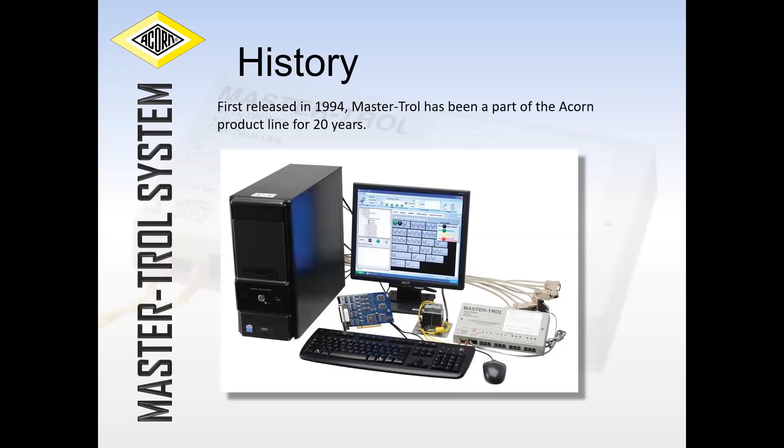A little history about the Master-Trol to start with. It was first released in '94 and has been part of the product line ever since. It all started off as fixture options that allow valves to operate with precise timing, have applied lockout options, as well as provide remote operation and disabling features. Again, this was primarily designed for the penal institutions where they can control when toilets and lavs were being used, or if they were being abused, to disable them so they're not, so inmates aren't flooding out their cells.

You'll notice on this particular controller, all of our Master-Trol controllers have the ability to connect up to 12 different solenoid valves. And when we talk about solenoid valves, if you look at a combi fixture, for example, combination lavatory and toilet, you have hot and cold water. You also have your toilet water. So theoretically, you've got 3 solenoid valves per fixture. Again, on the controller, you've got 12 stations where you can plug these into. So each solenoid has its own connection to the controller.

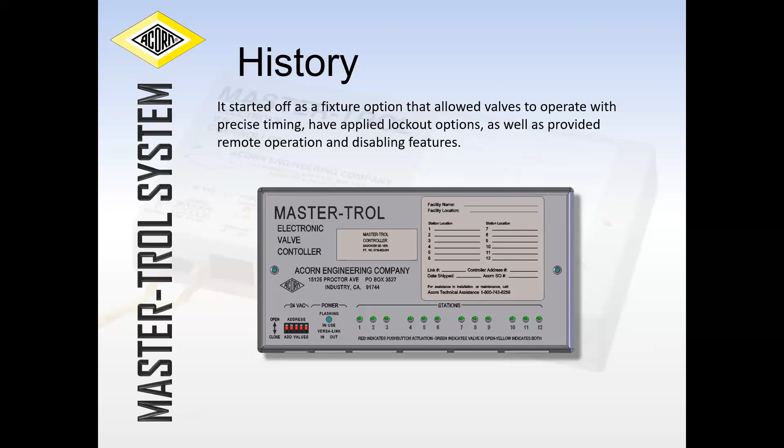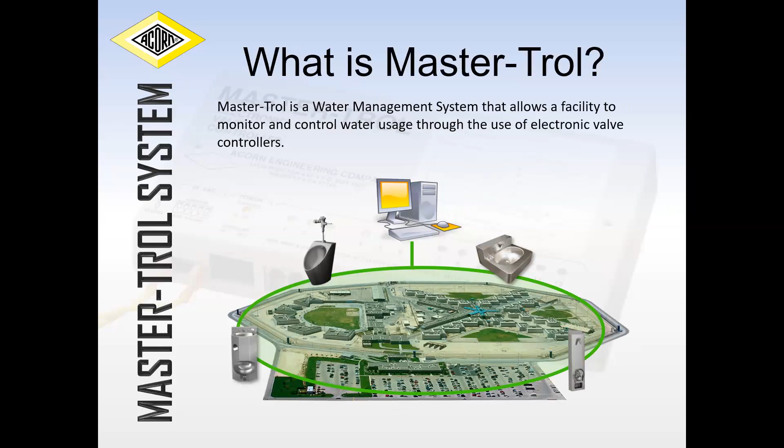Since then, we've grown into water management systems where now, again, today we offer controls for water savings as well as security. What is Master-Trol? Well, Master-Trol is a water management system that allows facilities to monitor and control water usage through the use of electronic valve controllers. Again, we talk about our controller. This is the main one, the main item that is part of the system itself.

Again, we talked about on a combi how you've got your solenoid valves on your lavatory for your hot and cold, or if it's tempered water only or cold water, either option works, as well as connections for your flush valve. What the controller is doing is controlling the valve timing characteristics.

When we talk about valve timing, how long do they run for? How long do they stay off for? How many times can you flush a toilet in a certain period of time?

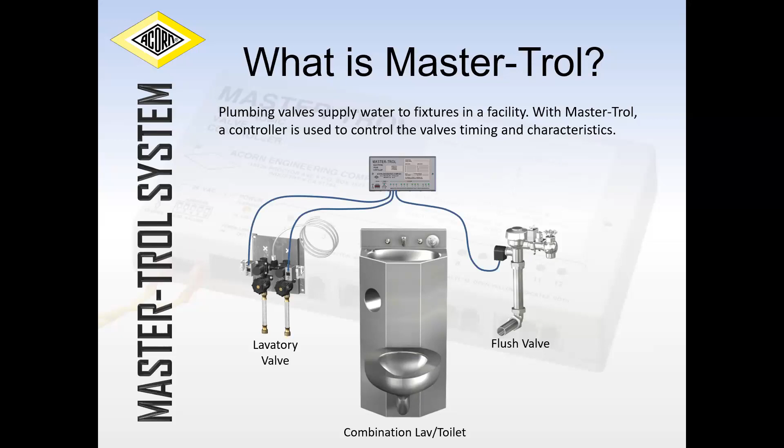With a controller, you've got connections to each solenoid valve to the controller. We're showing 3 going to this. Having 12 connections to it, theoretically, you can have up to 4 fixtures tied to a controller, assuming that you've got 3 solenoid valves per fixture.

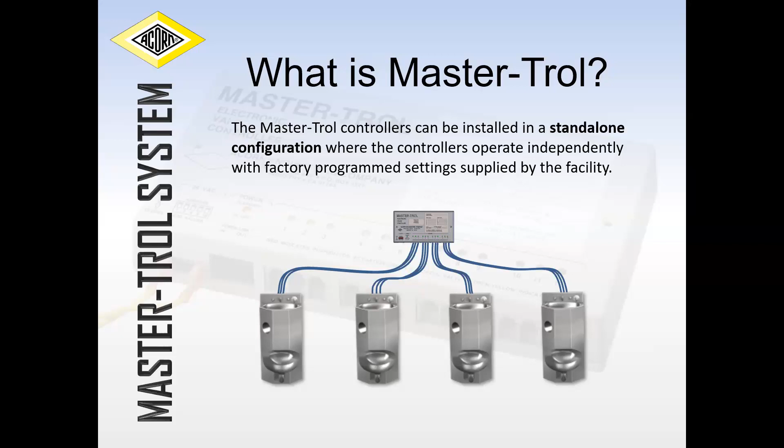Now, your Master-Trol controllers can be installed in a standalone configuration with independently factory programmed settings. So most often when we're doing timing on these controllers, the timing is done in the beginning, it's set once and then forgotten about. It's never changed or adapted after the fact.

When you get into larger facilities, they want to be able to control at will when certain fixtures are turned off or turned on. In a security application, if they were going to be checking cells for contraband, they can shut the cells down without the residents knowing about it, eliminating the option for them to flush contraband down. There's a couple of different ways of working with the controllers.

They can either be pre-programmed in the factory to whatever settings the facility requires. We can do it with a palm top controller, and what that does is, with the controller, if you wanted to make a change, you can then take that palm top to the controller, plug it in, and adjust settings as you see fit.

Or the ultimate way of doing it is using our computer system that we offer, our CDT, as it's called. Through that computer, you can monitor all of the solenoid valves that are on the system.

Maximum on a system that we can do, we can run about 4,000 feet of cabling from the computer to the furthest controller. That's right. And you can have as many as 3,072 solenoid valves on a system. That's sort of the max that you can go.

So if you're looking at a big prison facility where they have hundreds of cells, we can accommodate that. Or if you're doing a small police station where maybe they have half a dozen cells, it's an RCMP location up in Northwest Territories where they have 4 or 5, we can do something like this in that small of a facility.

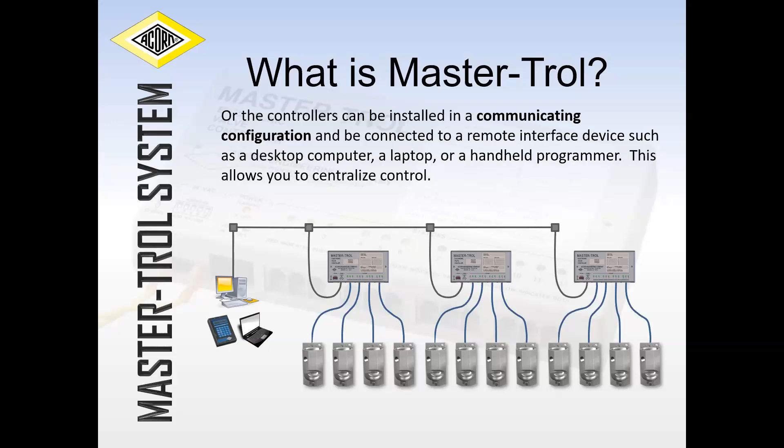Again, where is Master-Trol used? We talked initially about high security applications, whether that's a full-blown prison, police stations, courthouses, ideally where they're used. We're finding applications in healthcare, mental health facilities, where you have patient rooms where you want to limit how often the water is being used. Again, educational facilities.

Keep in mind, it's not just for toilet use. It can be used on lavatories, can be used on showers, could be used on drinking fountains as well. There's wide-ranging applications where it can be used, where you want to be able to control water.

For showers, if you're using a metering shower, typically metering showers are only able to run anywhere from 5 seconds to a minute. With Master-Trol, if you want to have those showers being able to run for 10 minutes at a time or 8 minutes, you're able to configure those showers to do that. So it gives you a lot of options on how to set this up.

Again, we're being used at Metropolitan Detention Center in Albuquerque, New Mexico. We have Waterloo Regional Police Station locally that's just getting it put in, with final install being done within the next 2 weeks and the computer system being set up. We have a police station in Belleville with 29 cells that has a Master-Trol system, and there's also one in Niagara Falls that has it as well. We've got a couple of other prisons in the U.S. where it's being installed. The Salinas Valley State Prison has Master-Trol installed in their mental health part of the building.

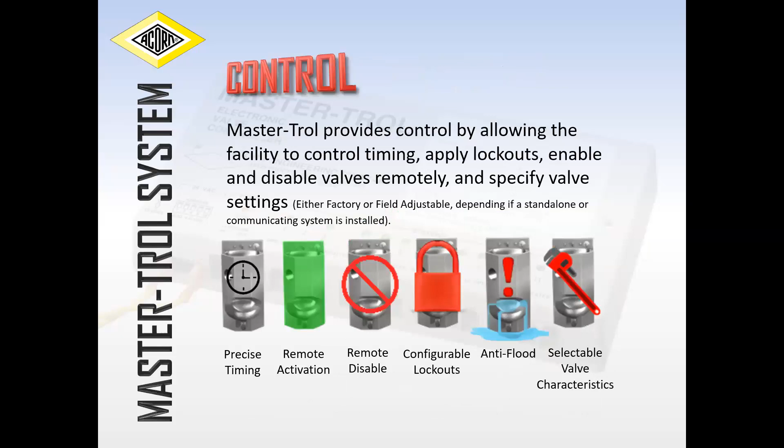It almost reminds me of the similar change in trap seal primers, from the flow-actuated or pressure-drop-actuated trap seal primer to the electronic trap seal primers. When you're just saving a little bit of water at one fixture, it's not a vast savings, but when that's extrapolated across all the fixtures across the year, you end up with a significant amount of water savings from more accurate usage, right?

Correct, and that's a great analogy, Zach. Being able to put electronic primers in, they're only priming once every 24 hours versus priming every time it's sensing a drop in pressure or when a fixture is turned on, depending on the type of primer being used.

For control, Master-Trol provides control to the facility. We talk about controlling timing, applying lockouts, enabling or disabling valves remotely. All this can be done through the computer system. If it's programmed in the facility, those timings are set at the factory, and the facility wouldn't have to adjust it at all.

Some of the things it's preventing is anti-flood on a toilet. So if somebody's plugging up a toilet, you want to be able to control that. Everything can be accessed from within the pipe space and behind, whether it's a walk-in pipe space or the controller being up in a ceiling space. As long as it's accessible, we can get at it to adjust timing if a computer isn't being used.

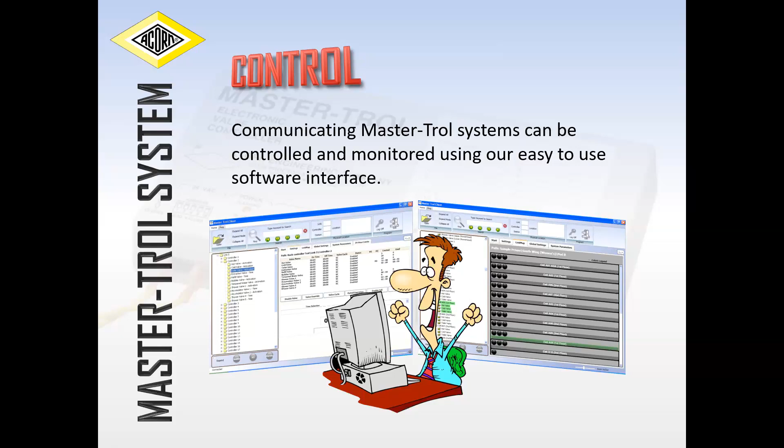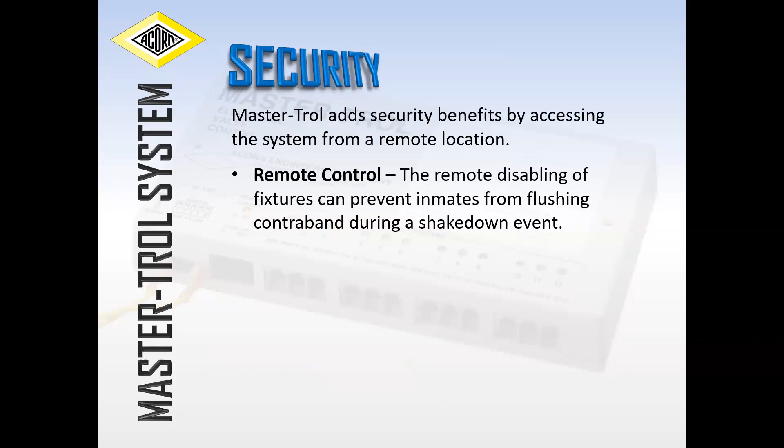With Master-Trol, it adds security benefits to the system from a remote location. Remote disabling of the fixtures can prevent inmates from flushing contraband during a shakedown event. It reduces dangerous interaction, as remote activation of the valves can reduce close interaction between potentially dangerous individuals and staff. All of this can be done within a pipe chase, so you're not having to go within the fixture or within the cell itself to get into any of these things.

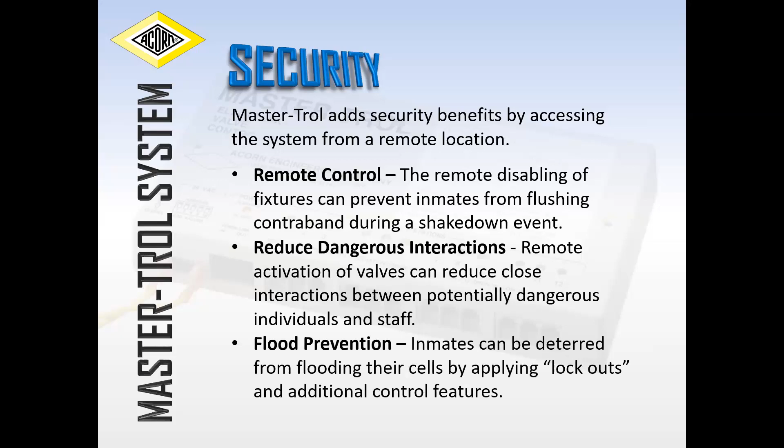Flood prevention is probably one of the biggest things we see with it. Inmates can be deterred from flooding their cells by applying lockouts and additional control features. With the lockouts, you can have it set so the inmate is able to flush the toilet, say 3 times in an hour. If they do that flush in rapid succession within the first 5 minutes of an hour, they won't be able to flush until the hour has passed. And if they happen to leave something that's causing a terrible smell, they're going to have to live with that until they're able to flush again.

Zach, you were talking a little bit earlier about water savings with trap seal primers. We did a water savings calculation with a facility in 2011. We were asked to demonstrate water savings by using Master-Trol at the Southwest Detention Center in Murrieta, California. We installed 2 water meters that recorded water usage in 2 sections of the facility - one meter recorded usage in 4 cells that had Master-Trol, and one had it without.

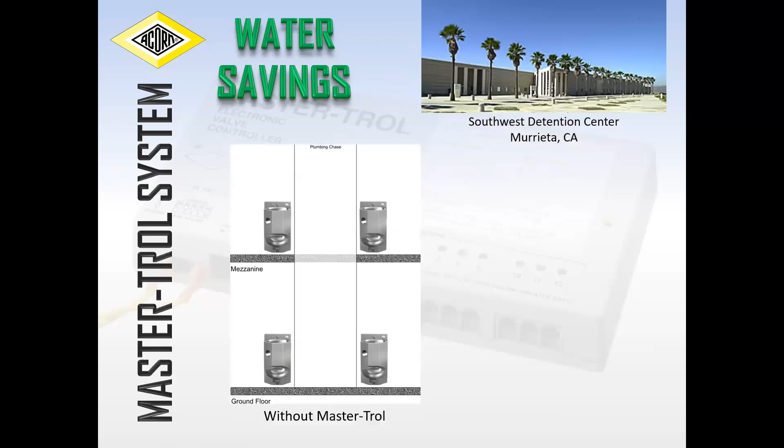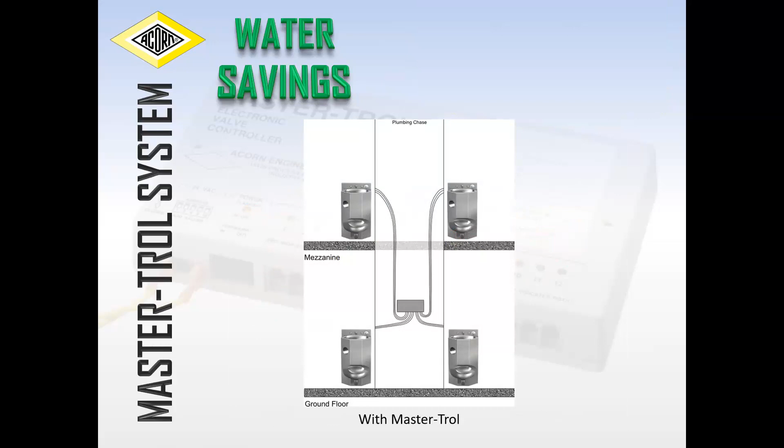Here you're seeing images where you've got a Master-Trol controller that's tied to 4 fixtures. 3 months later, between the two, the one with no controls went through 22,700 gallons of water. With the 4 fixtures tied to a Master-Trol controller, they ended up going through 8,380 gallons of water. So significant water savings just in 3 months.

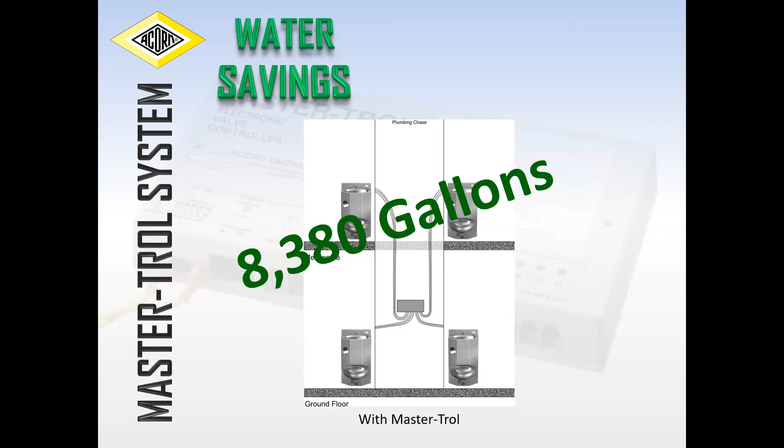If you did that over a year, you're talking about a 63% savings. And that was just 4 cells. Imagine doing that over, in this particular facility, 522 cells. When they went through the math, they calculated a savings of just under 7.5 million gallons of water.

In California at that time, the facility was paying $3.27 per 100 cubic feet of water. That gave them a savings over the year of a little over $32,000 in total. So putting in Master-Trol saved the facility a ton of water and a fair decent amount of money as well.

And that's not even necessarily just the reducing flow rate - there's no flow rate reduction there. No, that's just being able to shut things down when it needs to be shut down, whenever anything has gone into lockdown. Using it, if somebody's flushed the toilet 3 times rapidly, they're not able to use it for an hour. So you're restricting how often toilets and lavs can be used, and how much water is being used at any given time during the day.

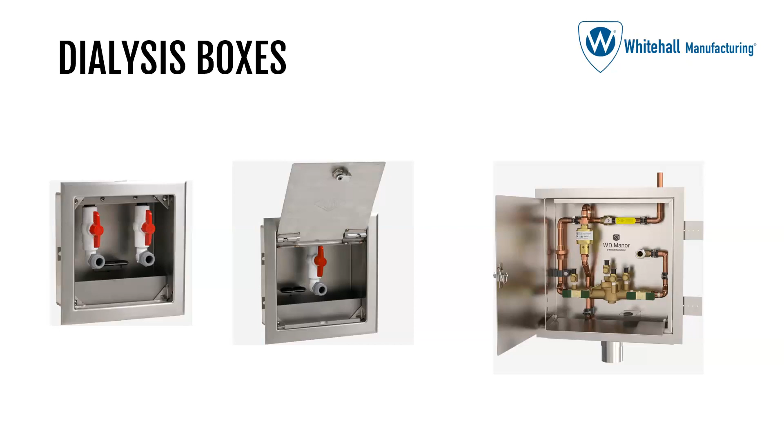So what is a dialysis box? Well, a dialysis box is a wall box. It's framed, recessed into a wall at each hemodialysis station that contains connections for the dialysis machine to receive acid and base concentrates and treated water, and dispose of waste products as well. This is the definition from the Centers for Disease Control and Prevention.

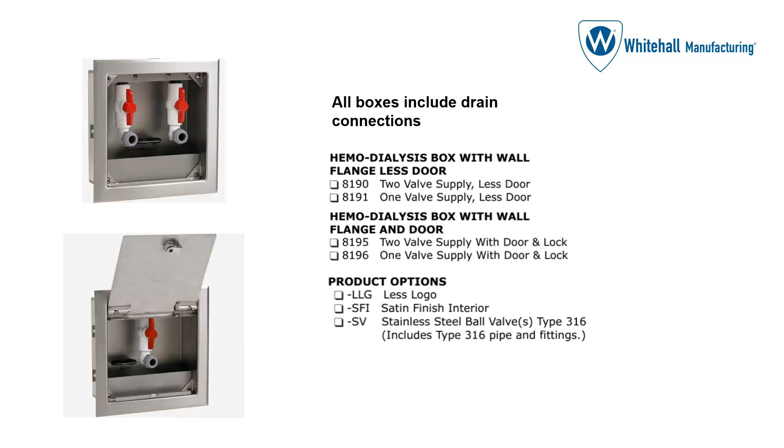Dialysis boxes include connections for both water coming in and a drain connection for discharge. There are different types of boxes, whether they have doors, no doors, just a flange, one valve or two valve, brackets for directing the hose from the dialysis machine into the drain connection in the bottom of the box. What you typically see as a standard is plastic valve assemblies on the inside. The boxes are typically stainless steel, but can also be done in 316 stainless steel. The piping and fittings can also include 316 stainless steel.

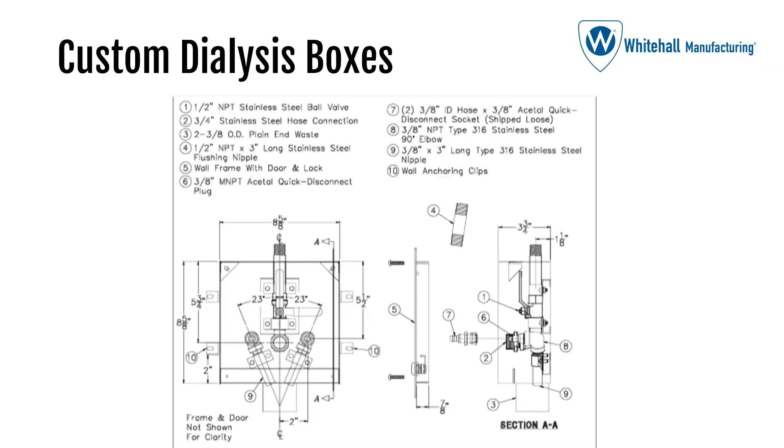Those are just our standard boxes. Our all-in-one modular system, as I mentioned before, our W.D. Manor box, is everything all in one. It's a new offering, stocked in the US. So what is this dialysis box and why is it the best on the market? Everything is located within the box itself - safe water delivery, no cross-contamination, job savings on all your piping, and you can customize it. Everything is in one box.

So again, what's in the box: a safer experience for the patient and the provider, prevents cross-contamination and minimizes liability. You'll notice the particular one we're showing here has a backflow preventer, also has a trap seal primer. We can include thermostatic mixing valves, has ball valves to isolate. There's also a drain connection on this one, a drip tray that folds outwards, so if your hosing comes loose within the box, any water that goes on that drip tray is directed back into the drain.

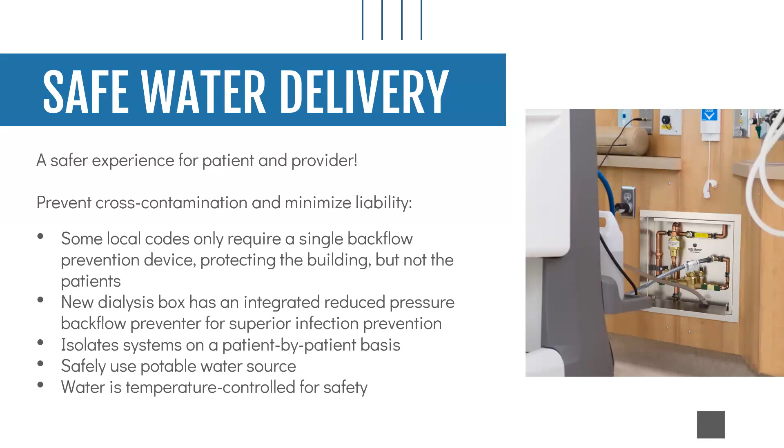This new dialysis box has an integrated reduced pressure backflow preventer, isolating the system on a patient-by-patient basis as opposed to having one central backflow preventer. It safely uses potable water at the source, and provides water temperature control for safety by incorporating a mixing valve into the assembly.

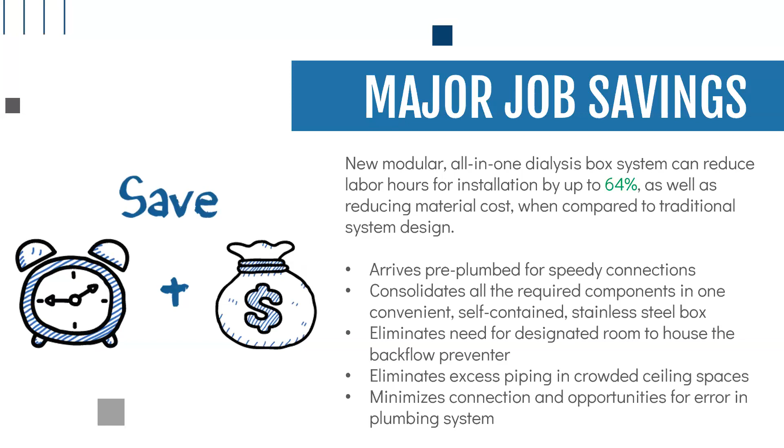It arrives pre-plumbed with speedy connections, eliminating the need for designing or designating a room within the facility to house your backflow preventer. This allows you to put in your smallest backflow preventer, eliminating excess piping in a crowded ceiling space. Probably the biggest issue is connection errors, and this reduces those.

So again, it reduces the amount of labor - you cut your labor almost by a third. Instead of putting in a conventional box, having one of these put in saves a whole lot of time in going through it. Each one is individual on its own, so each user is protected by an individual backflow preventer.

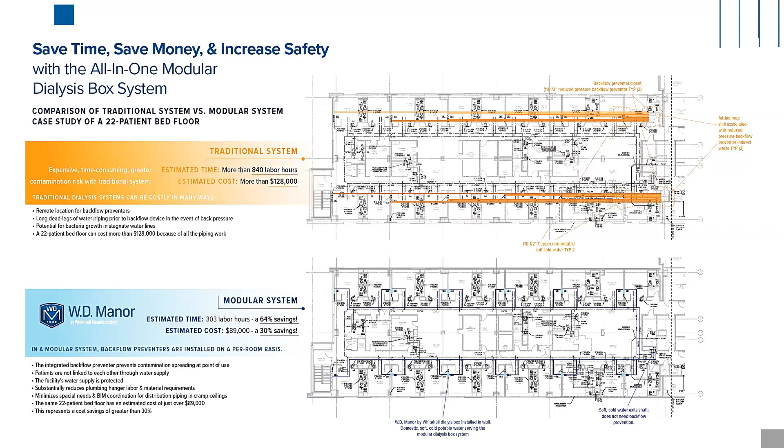We can configure the box into a different size if required to fit the existing wall spaces as well. So again, we can completely customize this box as required.

We've got two different versions. The 8193 has a backflow and a trap seal primer in it. You've got an isolation valve, your trap primer, your backflow preventer, fold down drip tray, your dialysis supply, and then a 2-inch waste connection. We also have the valves on the backflow for doing your testing when that needs to be done.

On the copper, there's a clear lacquer coat on it. If it has the door on it, the door opens a full 180 degrees. The hinge is also concealed. You've got your mounting tabs on the box to tie it into the drywall, and a discharge hose bracket, keeping that hose from flopping around within the box. It actually directs everything down into the waste connection.

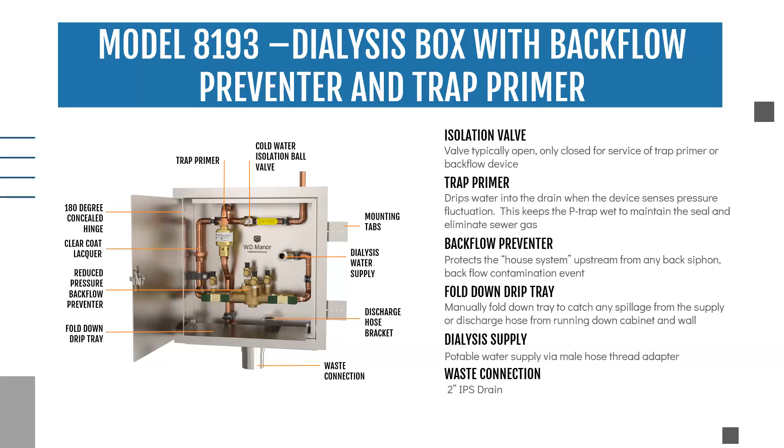Our 8194, again a dialysis box, has a backflow preventer, trap primer, and a thermostatic mixing valve. Adding the mixing valve, you've got a thermometer there to give you temperature, your isolation valves, and all the other features that the 8193 has. This box is a little bit bigger to accommodate the extra piping required by the thermostatic mixing valve.

And again, as you see in the image, that's how you would get it out of the box when it's shipped out. So everything's already there. It's just a matter of water in, drain connection out, and you're good to go.

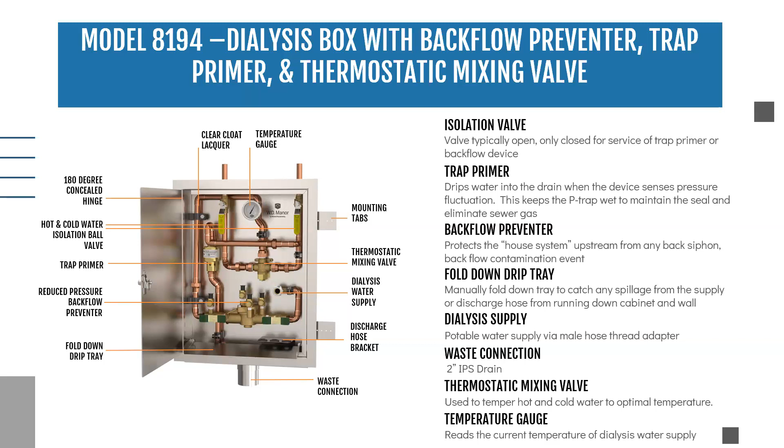Again, we talk about customization. The entry can come from the bottom as opposed to the top, quick disconnects for your supply fittings, customized sizing to fit whatever application you have, whether it's existing or not. This particular one is showing a white box. If they want it all in stainless steel, we can do that as well, and in those cases they would be made to order.

Again, types of applications - typically it's used for dialysis boxes and ICU rooms, isolation rooms, emergency departments, trauma, dialysis, infusion bays, other healthcare non-dialysis use, sterilizer hookups, Stryker and Neptune docking stations in lab spaces, usually where a piece of equipment requires a backflow and soft water, and in birthing units where they need mixed water or a mixing valve.

Non-healthcare uses include ice maker hookups - installations in some bars at State Farm Stadium, they've got this setup for their ice machines and soda fountains.

Huh, I never would have thought about it for that, but I guess, yeah, because those often need their own premise isolation backflow device as well as part of the total backflow prevention plan. That's correct, interesting. We did have a question.

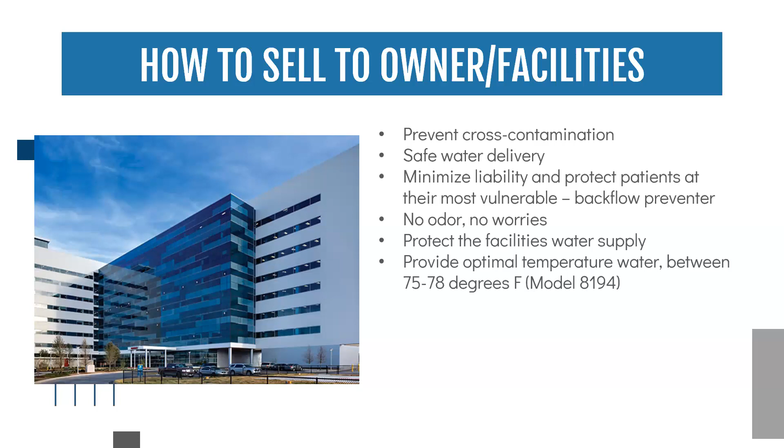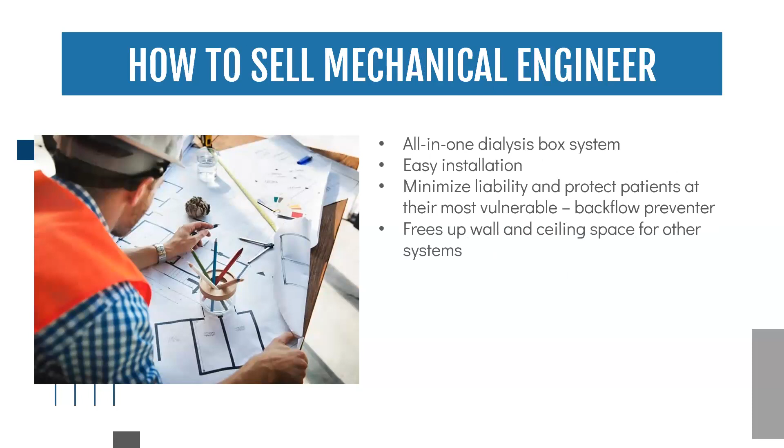With a mixing valve, we can keep the temperature constant between 75 and 78 degrees Fahrenheit using the model with the mixing valve, the 8194. It's all in one, everything's in one location. Your trap seal primer, your backflow, again frees up ceiling space so you can run other things up there, or keep it a little cleaner and not so crowded when it comes to putting things in.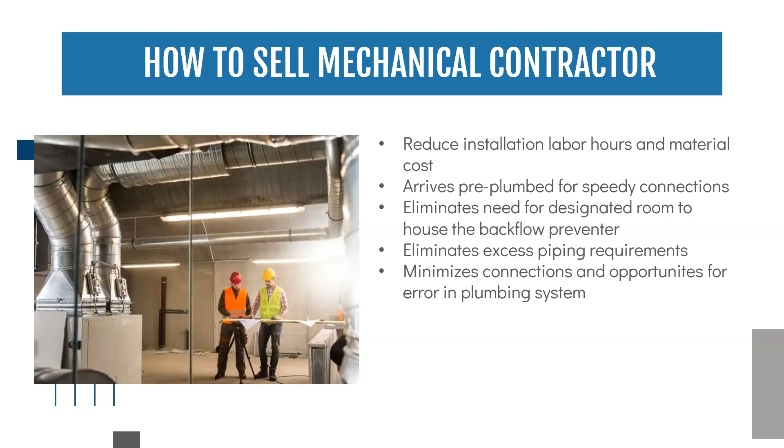Again, reduced installation, labor hours and material required. It arrives pre-plumbed and ready to go, eliminating the need to have a designated room for your backflow preventers. It eliminates excess piping requirements and minimizes connections, reducing opportunities for error in the plumbing system. The last thing you need is all this piping and a leak, trying to figure out where it's occurring. And that's the basics on dialysis boxes.

Any questions? That's great, Jared. Yeah, I think one of the interesting things to me is how often this is going to come up over the next little bit. Piecemealing all those components together is always going to be more expensive and more convoluted than getting them all in one spot.

So I could definitely see a situation over the next little bit where the typical two water hammer arresters inside of a box start getting sent out to the market. Most people are going to be looking for a connection like this, where it's an in and out and everything's in a singular box. I think it's a great idea.

The other thing I should mention, a very important point, it's CSA approved as well. Great point, very important. So as those boxes are laid out, the typical 8193, the 8194, as is, they are CSA approved. That was done probably about a year ago.

Any questions on the dialysis box?

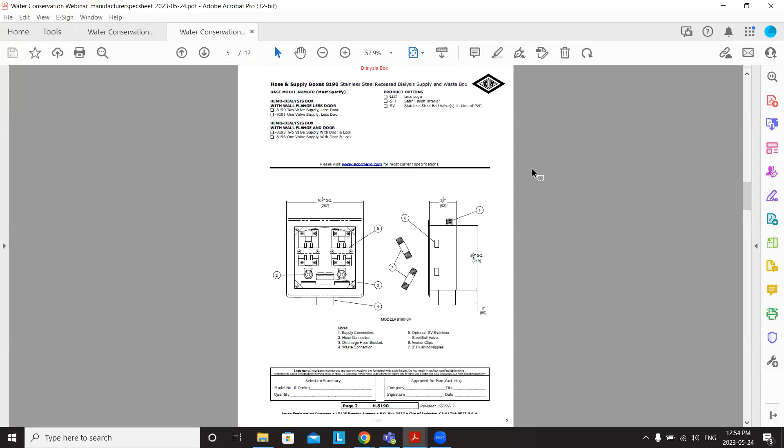With the manufacturer spec sheet format, you do get a table of contents with what you call the fixtures. You get a nice little fixture title page. I just selected a basic dialysis box, not the newly launched 8193. We have our combination unit and that shower with the MasterTrol like we talked about.

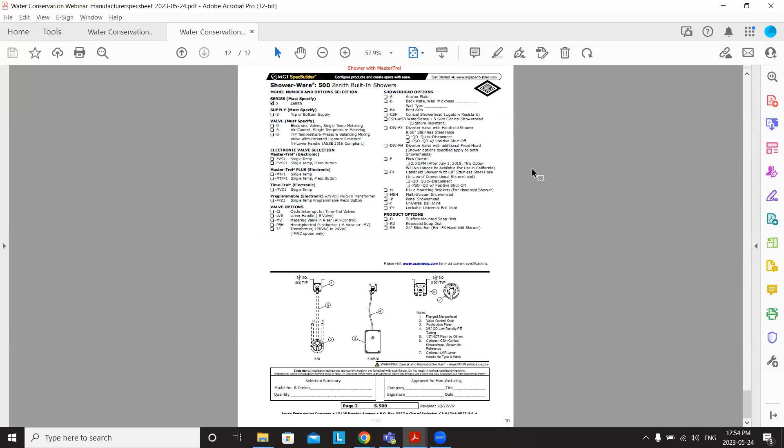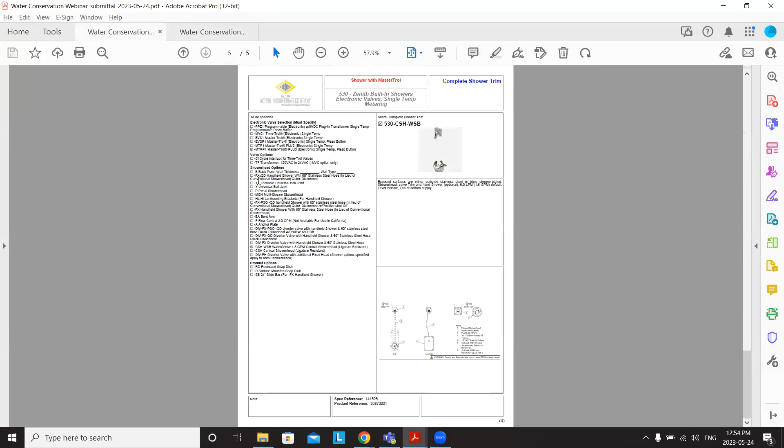Versus the submittal format, all your options, all the details you need, and it's actually showing the options that you checked off instead of just a blank version.

If we want to download a quick Word spec, we did also launch a new format in this. It's called exclude page formatting, and this will just give you a cleaner version to copy from. Generally, what people need to do is download this in Word, select the information you wish to copy, and bring that into your firm's Word format.

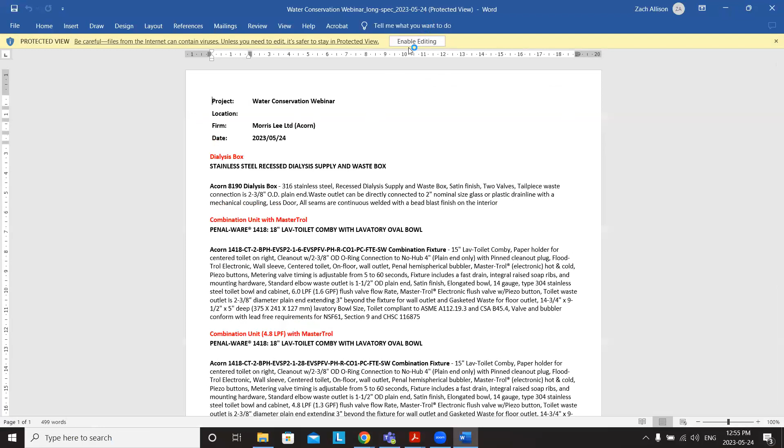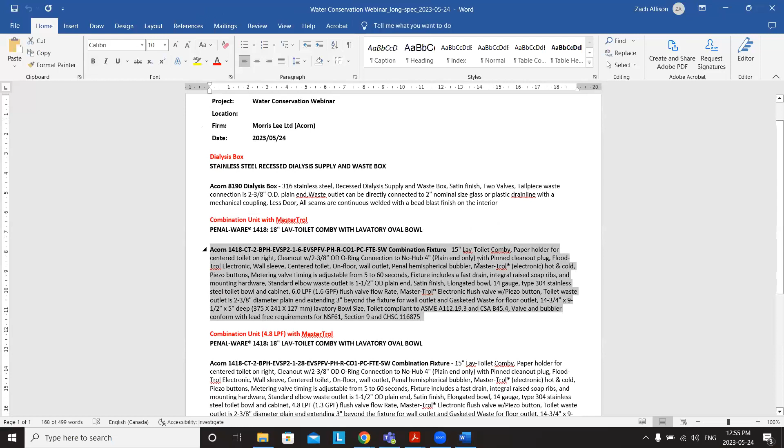Excluding the page formatting gives you a little bit of a cleaner version to copy from. Our general format does have some page formatting here, whereas everything here is just left justified. So you could go in, copy as much or as little of this as you wish. You can just copy this portion, copy the whole thing, and send that out into the rest of your written package. And that's the general way to use the system.

Now, if you've gone in and set up a master ahead of time, you can see we've got a handful of masters here for Jared that he uses regularly. On the safety side, you could go over to the action button and copy this into that spec. We also have recently launched templates, and the templates are the standard selections based on application.

So if you wanted to add drainage to this, you can search for prison—I don't know what term we call it, but we'll put office just for standard finding. You can find your office master template. You could do a school as well.

You look for the long-term care template. Once you're within the template, you can select the fixtures that you need and copy these specific fixtures into your package.

So we could copy as much or as little of this. I'll select all, go to the copy button, and we can put this into the specification we just created. It might take a minute to copy all that information over. You can also use this new button to create a new spec or a new project from this. It's certainly faster than reselecting everything, that little bit of waiting time to copy all these fixtures into your general format.